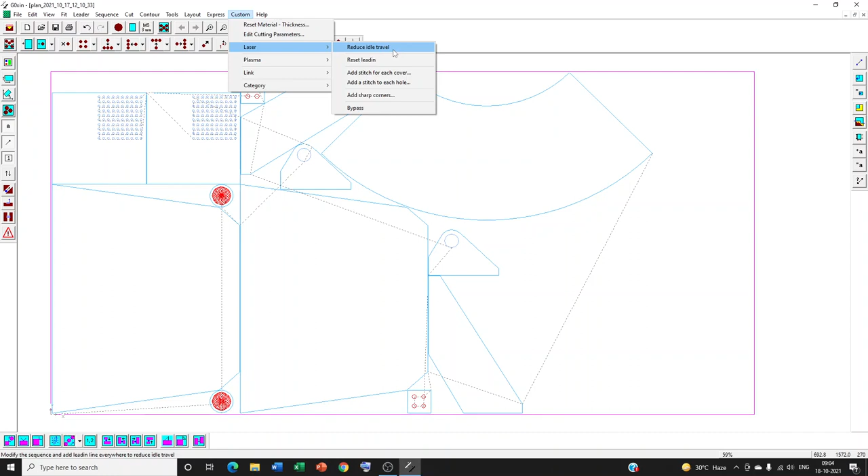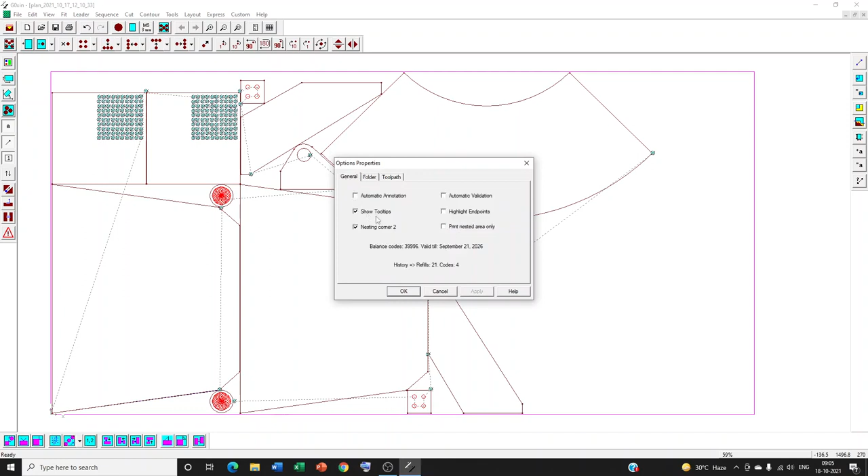Go to options, go to general options, turn the tool tips on, and just position the mouse on the boundary of any cycle. Here you can see the sequence number is 262 in line number 2. And if you go here, that is sequence number 225, see the line number 3. It is called line mark, so it's a marking contour, not a cutting contour - the red color line that you see on your screen here. And if you see here, you will see sequence number 204, and that's a drilling cycle, as you can see in line number 3.

But suppose you want to see them in action, in which sequence they are taken up. For that, you have to press the button F3 on your keyboard twice.

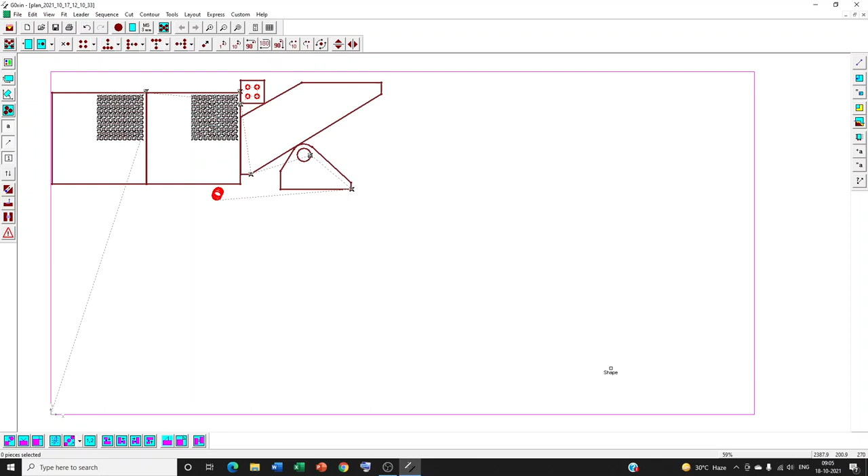आपके कीबोर्ड पर F3 नाम का बटन प्रेस करेंगे तो क्विकली आपको सीक्वेंस में बता देगा किस तरह से ये प्रोफाइल्स, किस तरह से साइकिल्स आपका मशीन हैंडल करेगा, कौन सा सीक्वेंस मिलेगा.

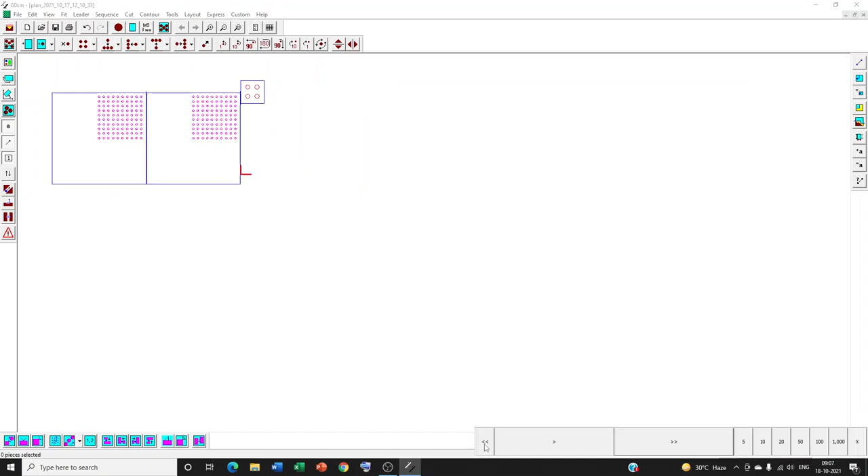Escape की दबाकर इसको आप ब्रेक कर सकते हैं.

So, as I said, you can generate the cutting sequence and lead-in lead-out for the entire layout using this option, laser reduce idle travel, for laser cutting operations. Now, if you want to do the same thing for oxyplasma cutting, you can use this option under the custom menu. यहाँ पर भी आपको अपनी सीक्वेंस और लीड इन लीड आउट साथ में इकट्ठा चेंज करने का ऑप्शन दिया गया है.

And as I said, the simplest option is here. Go to sequence, auto sequence. Now, there is one more method.

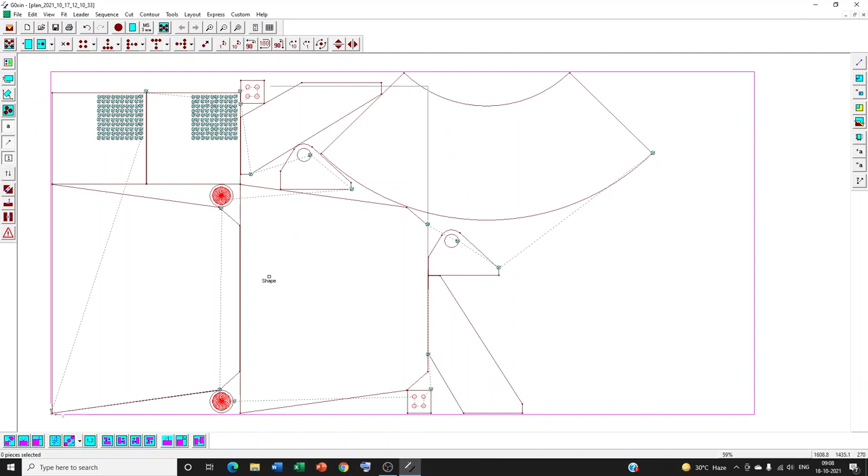For example, if you have generated a layout in the form of an X and Y grid, something like a matrix, something like a regular repeat of components. For example, let's put it in this manner. Components को मैं delete कर रहा हूँ, I'm removing this, and I'm making an array of this.

Now in this case, it may be helpful to generate the sequence along the X and Y axis using this option: sequence, simple sequence.

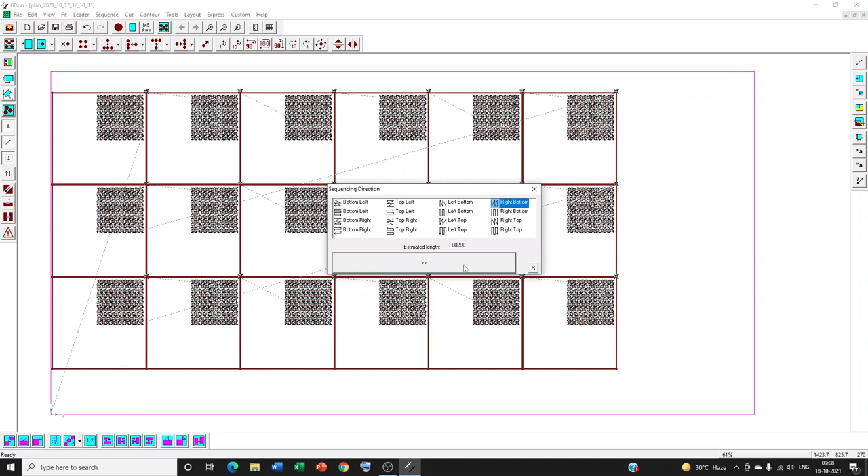यहाँ पर बहुत सारे ऑप्शंस आपको मिलेंगे. क्लिक करते जाइए, नीचे एस्टिमेटेड रैपिड मोशन लेंथ मिलेगी. Choose the option that gives you minimum estimated length of rapid travel and see how it goes. The sequence would be regenerated.

If you play it, it will be shown on your screen in the quick simulation by pressing the key F3. Like this.

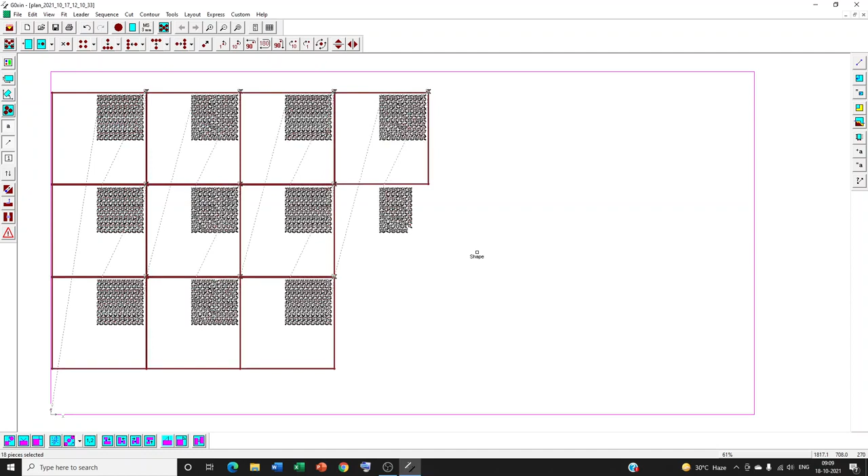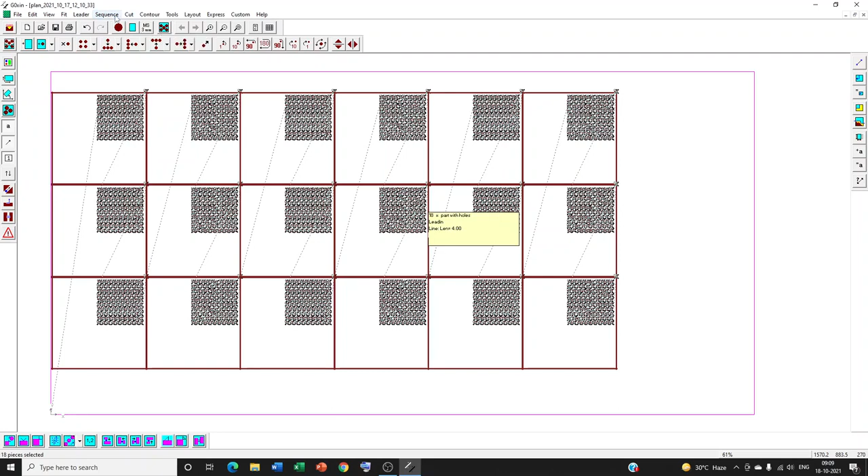Finally, let me show you a very specific case of sequencing where you may want to sequence the processes. In that case, you want to generate a cutting sequence such that all the drilling operations are performed first. These are your drilling operations. ये जो 4 होल्स है वो ड्रिल्स है. नीचे भी इसी तरह का एक कंपोनेंट बनाया गया है.

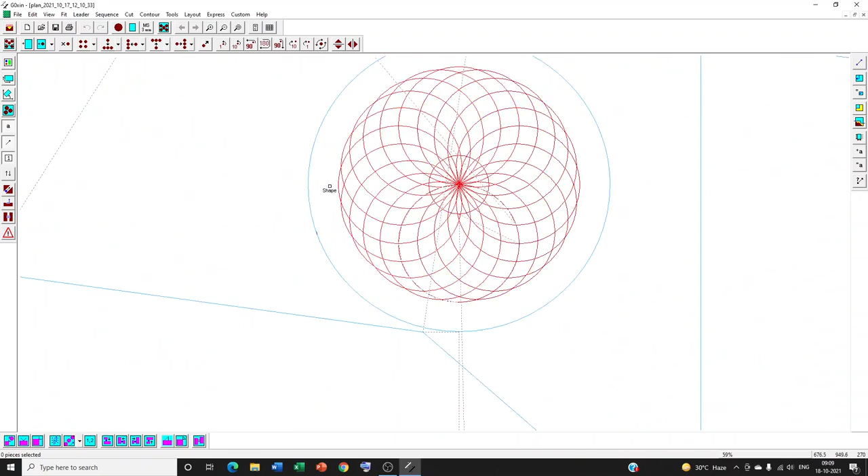These are drills. Then you may want to carry out the marking operation for the entire layout जो यहाँ पर है ये component में. Here also you can see some marking circles. And then you want to take up cutting contours.

So what you are trying to do is you want to complete all the drilling operations first. Then you want to carry out all the marking operations for the entire layout, and then you want to handle the cutting cycles for the entire layout.

That is called process priority. Go to the express menu, click on process priority, specify your options: drilling, marking, and then finally cutting.

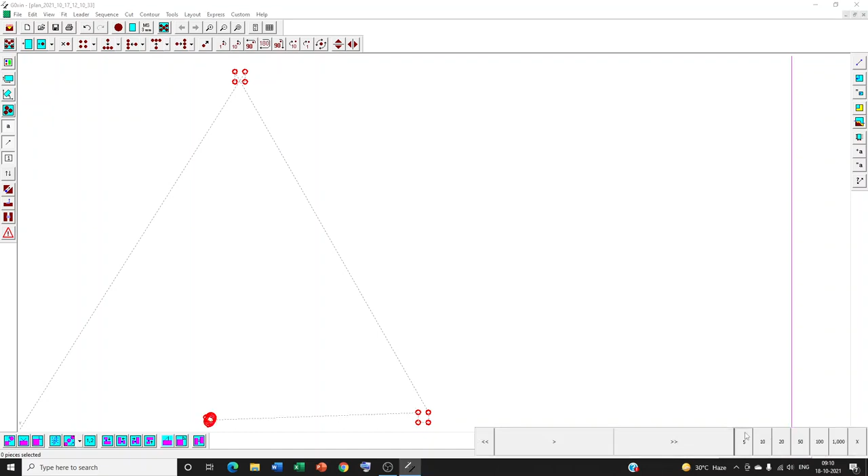Now if you simulate, this is too fast. You can see the drilling operations are carried out first. And then marking operations are carried out. And then the cutting operations.

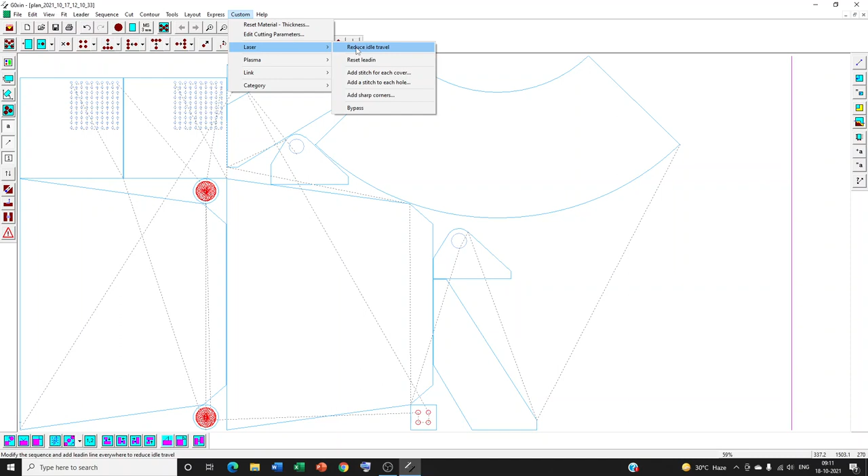And so on. So these are the main options for generating cutting sequence automatically: this is auto sequence, this is simple sequence along the XY axis, this is the option for generating sequence as well as lead-in lead-out for the entire layout for laser cutting, and a similar option for plasma cutting over here.